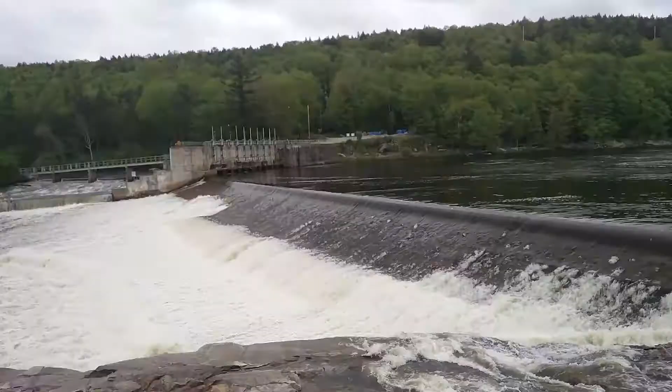So this air is very valuable. It's called isothermically compressed. Now isothermically compressed air, it's very, very clean. What about electricity? Very easily converts to electricity because no problem getting good high speeds on generators. Some of these machines were 4,600 horsepower. So they're gigantic machines. Yes, you'll love the name.

You can have quite a gentle stream. You're only going to take it up 10 feet and drop it down this shaft. And when it comes back up again and goes on, you can drop it down again somewhere else. So time after time after time after time. Trompy, trompy, trompy.

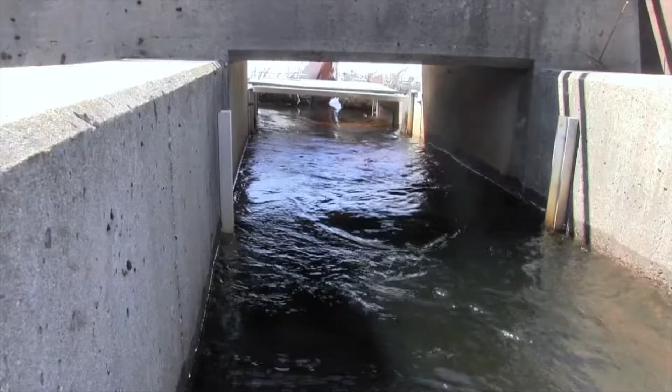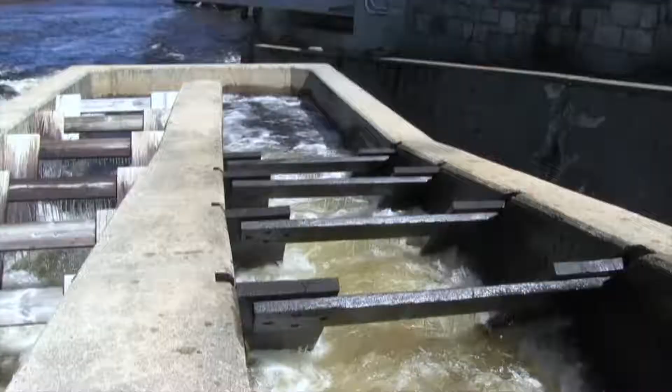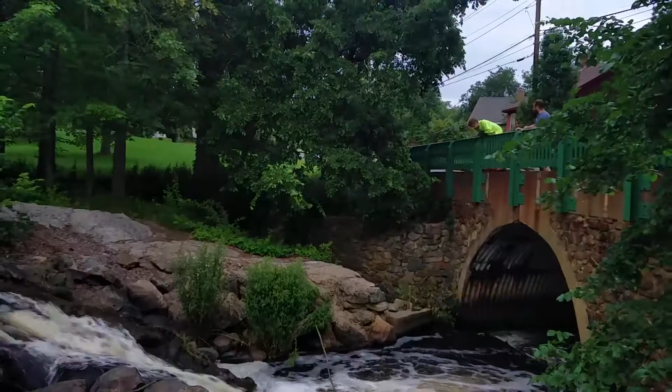And one thing everybody knows who grew up in the days of Tromps is that there's a lot of trout in these streams because you never get every bubble out. And so you have very well oxygenated water going from Tromp to Tromp. If you use fairly clean water, you end up with extraordinarily clean water. So it's very beneficial. It's a beautiful system, no moving parts. You know, in and out fast, no one gets hurt. And you can't forget the name, can you? Tromp.

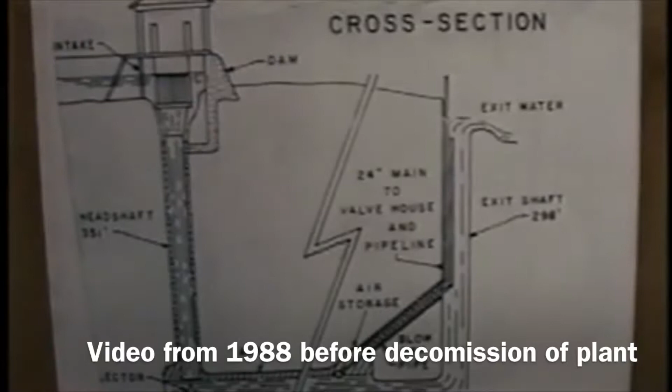This is a drawing showing the construction schematics of the Ragged Chutes air plant built on the Montreal River around 1910 to supply compressed air to the numerous mines at Cobalt. At the Ragged Chutes air plant, the water flows into a large chamber 40 by 50 feet, where twin heads 16 feet in diameter with 72 14-inch diameter circular pipes in each head.

The water covers these pipes at a controlled depth so that the swirling waters entering the pipes suck down large amounts of air and takes it to the bottom of the shaft, 351 feet from surface. At the bottom of the shaft, the water strikes two steel-covered, concrete-covered pillars, and then proceeds 1,221 feet in the horizontal tunnel, and then discharged through the exit shaft into the Montreal River.

These steel-covered cones at the bottom of the shaft help to separate the air from the water, and as the water and air travel along this tunnel, it rises and comes into an air chamber or a receiver, and then rises to the top, and it will reach a pressure of 125 pounds per square inch. This air is sent to surface through a 24-inch steel pipe, and from there it is sent on into the numerous mines in Cobalt.

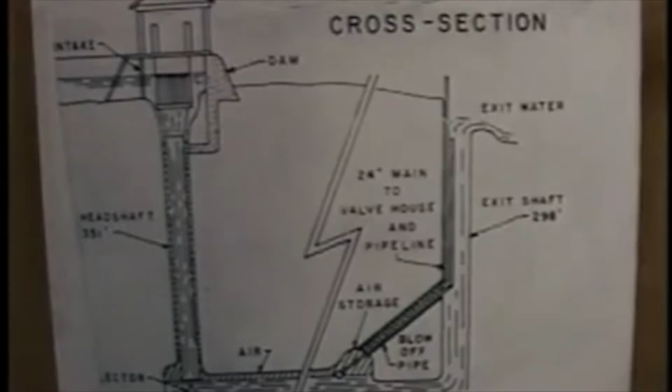On a bright sunny day, water and air is all mixed up with sunlight in the area.

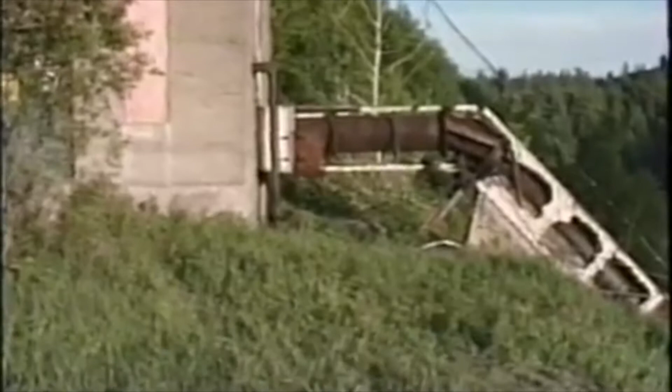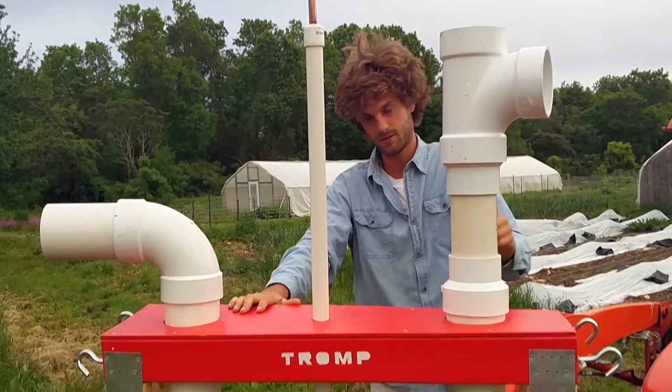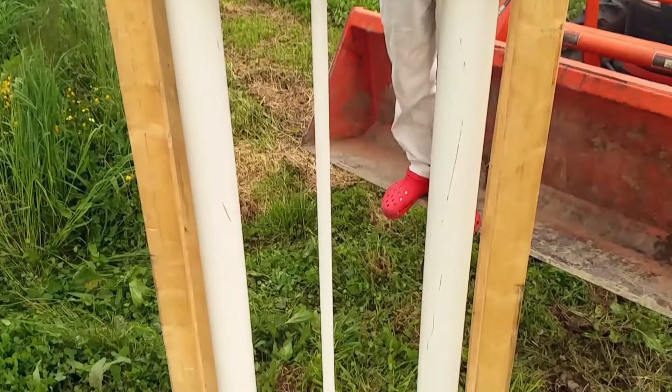I made a little model Tromp too, and this is how it works. The water and air enter up here, they go down the U, over, up the U, and then shoot out. Then this little pipe here goes down to that pocket of air, and I put this little valve on top up here. Here's a closer look at this part.

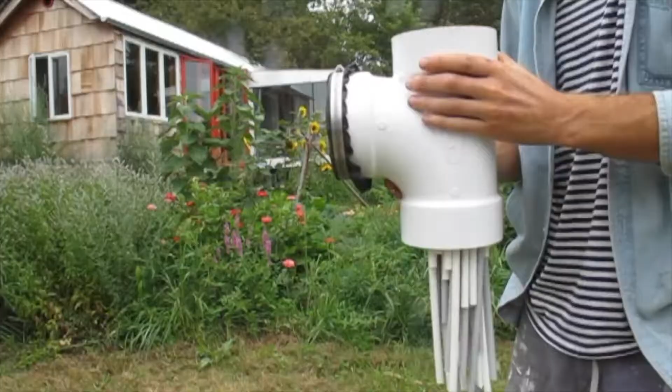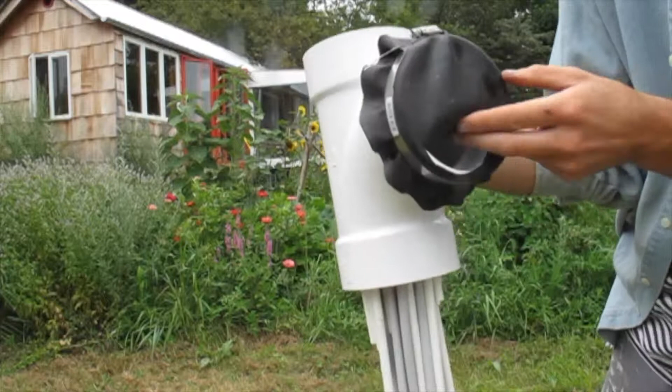Water goes in the side, air gets sucked in the top. This is what it looks like when it's off. I made it out of a PVC T, some straws, and some silicone from the store. The tops of the straws are exposed to the air, and water goes in through the side through this flap, which keeps the vacuum seal. As the water falls down, it surrounds the bottom of each straw, creating a little vacuum sucking the air in from the top.

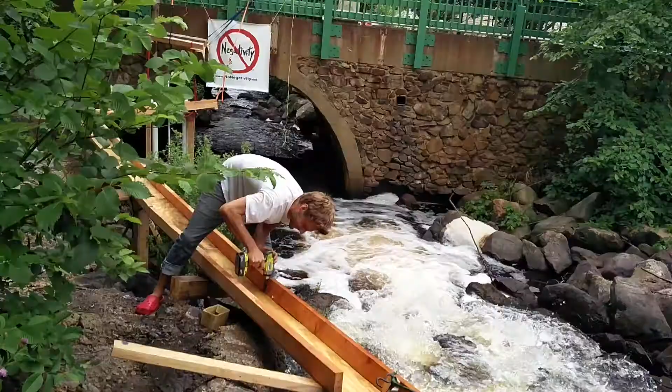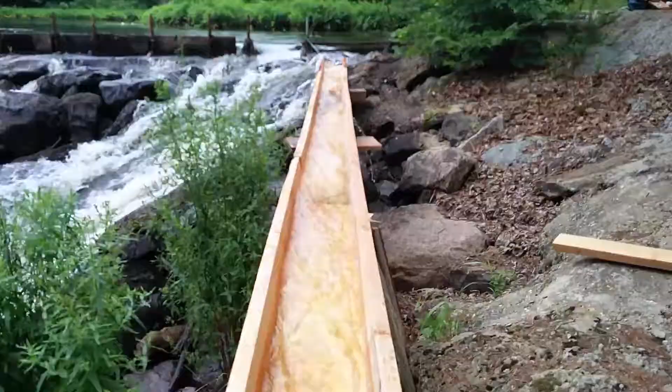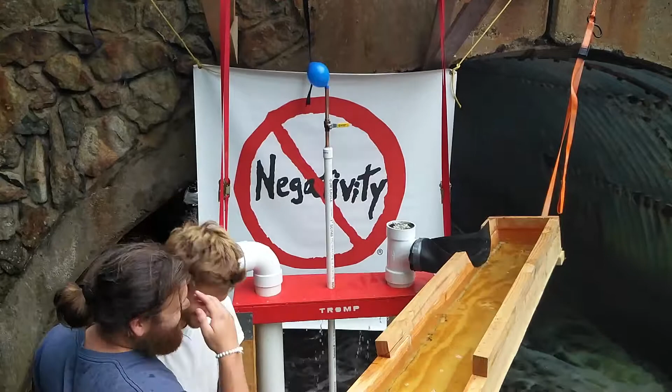Recently, on a trip to Ottawa, I got to meet with inventor Afif Abu Raphael. Afif is the inventor of a plug which stopped the world's largest oil spill ever, and Afif remains to get credit for this work.

How did you get to know about me? I'll tell you, because I am so interested in these Tromps, and I was just doing research on the computer, and I came across the Ragged Chutes air plant, and I found this website, and I saw your comments, and that's literally how I learned about you. Yeah, through that you got interested. I'm so interested, I'm wicked interested.

Okay, Mr. Taylor. Well, Mr. Taylor was bright, you remember? Here in Buckingham, right here. Yeah, he invented his compressor. Are you serious? Right here. Right there, and he was a smart guy. Well, he was smart and maybe, well, I took it, but nobody looks at the Canadian museum stuff, they don't know about the compressor. Why don't they know about it? Nobody knows, why? Stupid, because nobody, they don't know what to do with it, and it is the best tool to produce electricity from water and produce more. That's something, so that's another invention, we should work on it, we should work and make it work.

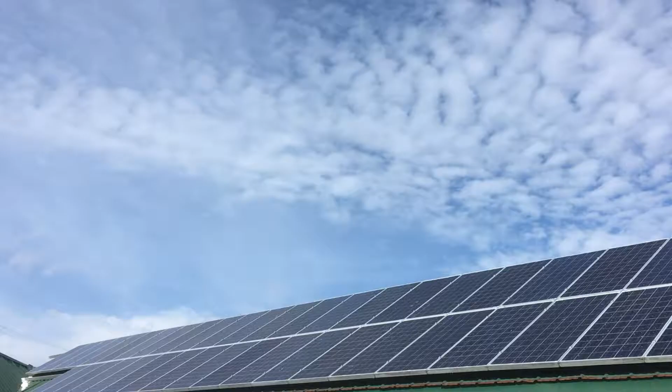Solar panels, as a renewable source of energy, have a relatively small to neutral impact on the environment. The raw materials needed to build the panels have to be mined, or are sometimes recycled. Tromps, however, when made with concrete and steel, will last for a really long time with little maintenance - until it gets busted by an earthquake. Running a tromp also has the positive effect of dissolving oxygen into the water, which is very beneficial to the biology of the river. Tromps can be very powerful, and like they say, with great power comes great responsibility. If we're using the flow of the river today, we must do our best to make sure the river flows tomorrow.